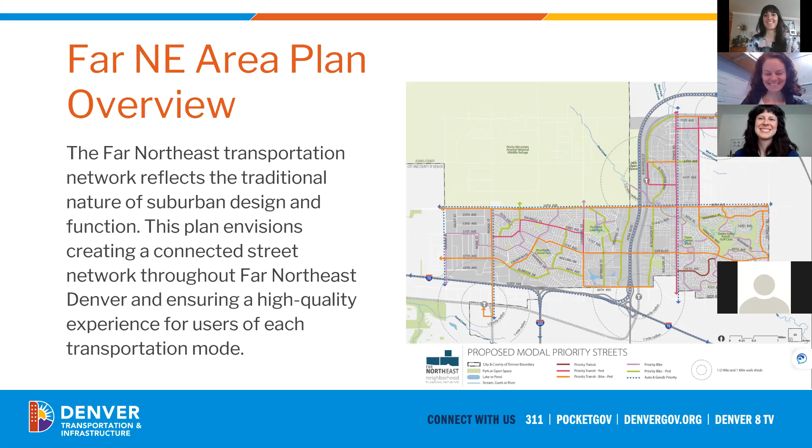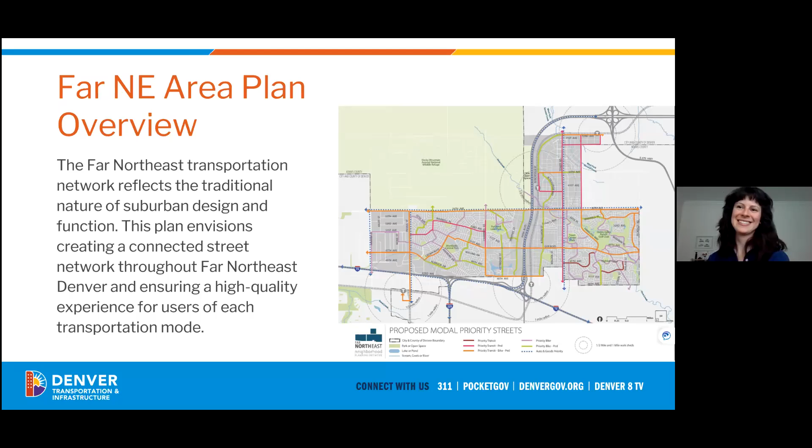Yes, so great. Hello, everyone. Glad to join you. Finally got logged in here, but I wanted to just really say that this is a great opportunity. We are really excited to be a part of this open house and to see how many of you who participated in the Far Northeast Area Plan can really truly see how plans continue to work and advance your priorities as a community.

The Far Northeast Area Plan that I had the privilege of working with many of you on, several, about 2-3 years ago for a couple of years, really laid the foundation for a lot of the city investments and infrastructure and community desired goals and objectives that you all are beginning to see materialize in your communities.

So really working with you all, working with a key stakeholder group, members of your community, many of you who have lived in the neighborhood for several generations, in hearing and learning and growing from you all and understanding really truly how you imagine your communities, your 3 neighborhoods evolving and growing over the next 10 to 15 to 20 years really was the foundation for the Far Northeast Area Plan, and really helped us as a city truly understand your community, your individual neighbors, and all of you in such a meaningful way so that we could develop a plan that represented your dreams and wishes and aspirations.

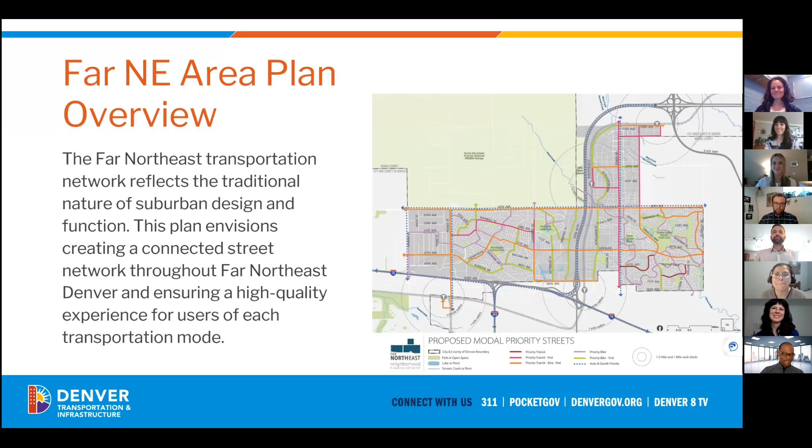I'm Paige Colton for the Far Northeast Next Steps Study. So that's, as Eugene had mentioned, an initiative by the Denver Department of Transportation and Infrastructure, so dealing with all mobility and infrastructure issues, an implementation plan to move all of the great transportation ideas that came out of the area plan.

I'm just going to walk through briefly what this Next Steps Study will look like, and then we'll get into some fun polling exercises. So our first step, and something we've already started, is to evaluate the proposed transportation networks that came out of the area plan.

We split the recommendations that came out of the area plan into distinct logical projects. So, you know, maybe a concern was, wow, Montbello has a lot of speeding. So how do we break that into individual projects that we can actually deliver on? It's evaluating essentially, are these feasible projects, and then further detailing out what these projects might end up looking like.

We're then going to score and prioritize these projects. So there are a lot of projects, over 100 that came out of the area plan. Which should we look at doing first? Which are a high priority for the community? Which can we get funding for within our department? These are all questions we're going to be asking ourselves.

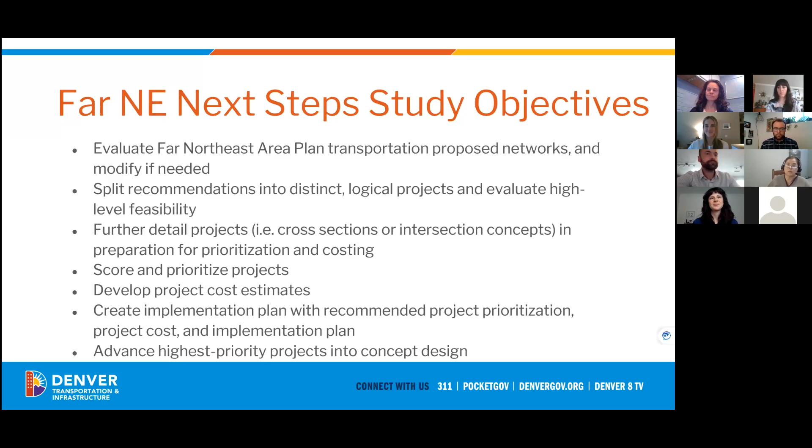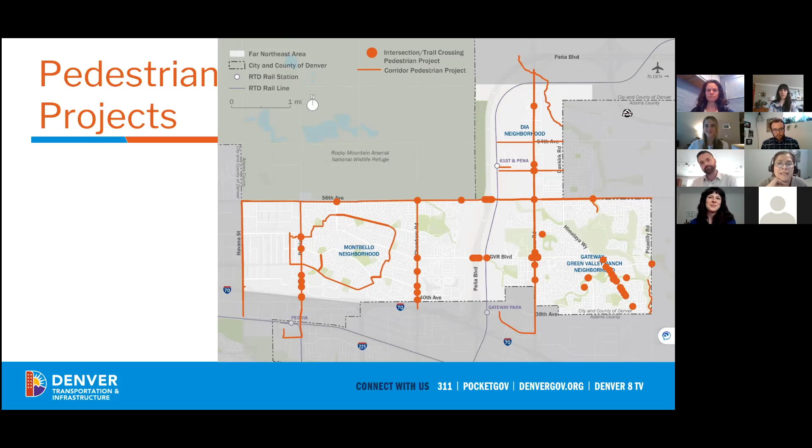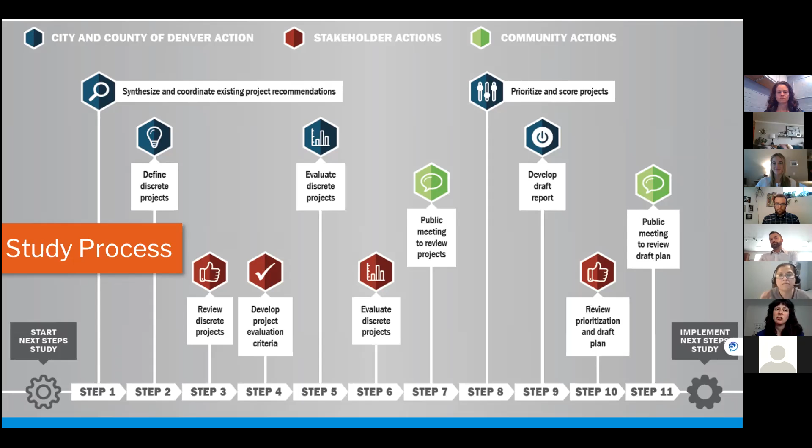Right now we are working on prioritizing projects, and we want your input on how exactly to prioritize those. We'll also run the full list of projects and our draft plan by you later this year. Next slide.

To understand can we get funding for these projects, how constructible are they, are they easy to build, are they harder to build, can we package them with other projects. That'll also help determine the timeline of when we build these projects out - how internally we can implement them. So just walking through the evaluation criteria briefly, which is intended to reflect your priorities.

So growth pressure is intended to prioritize projects in areas that the area plan identified as being regional centers, community centers, that sort of thing.

Safety is intended to prioritize projects that improve safety on our roads, especially on corridors that we consider especially dangerous in the city.

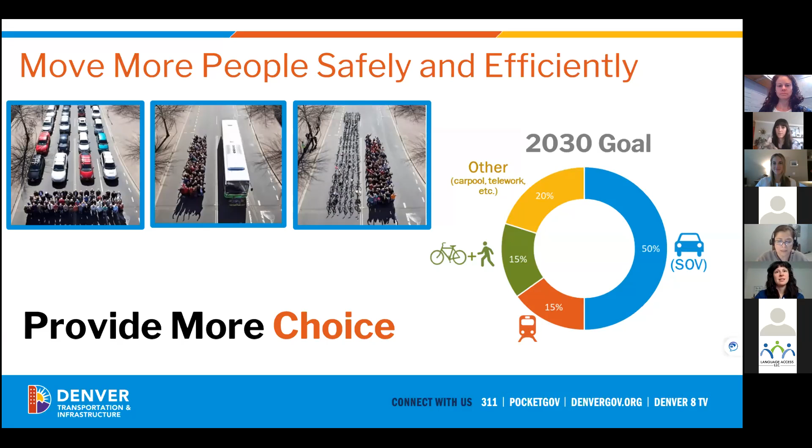Next slide. This slide lays out the mobility goals we're looking at as we move throughout the city and plan projects. One goal to highlight is that we would ideally like 30% of all people commuting to work to be biking, walking, or taking transit by 2030. Next slide.

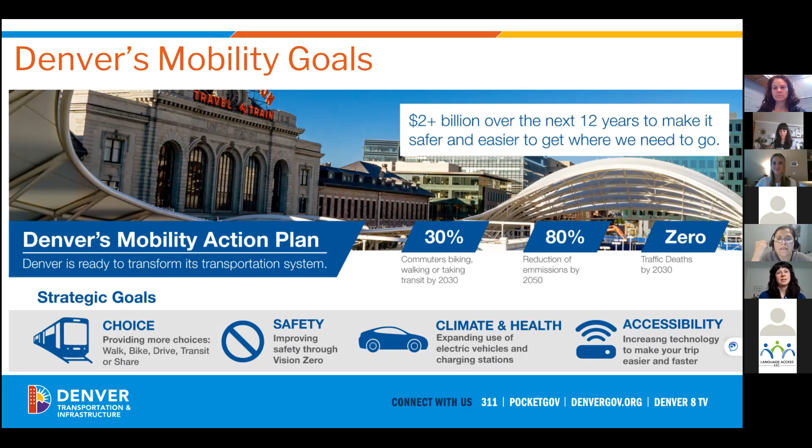Another really big goal is safety. Our goal is to have zero traffic deaths, fatalities, or serious injuries by 2030. These graphics show how people are injured and killed on our streets throughout the city.

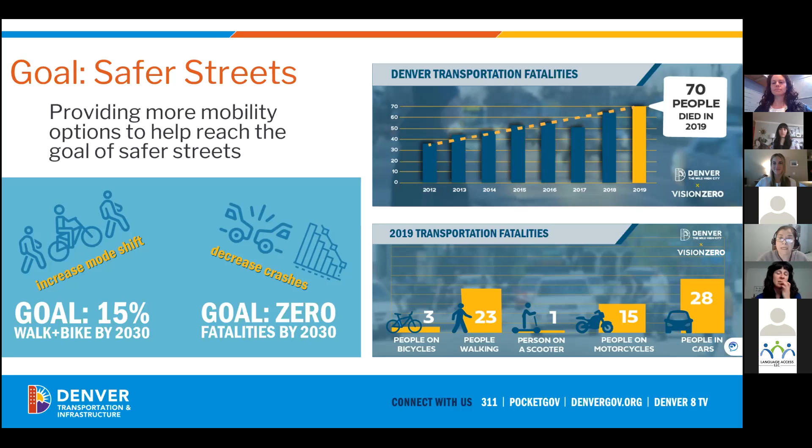So how do we achieve our commute and safety goals in the city? It has to do with our public right-of-way, which is the street space where people drive and bike, the landscaped median where our trees are, and the sidewalks. There are a lot of competing uses for these spaces, and it's one of our largest and most important public spaces in the city of Denver. So how do we think about reallocating space on our streets to improve safety, provide choice for folks, and encourage people to choose modes other than driving?

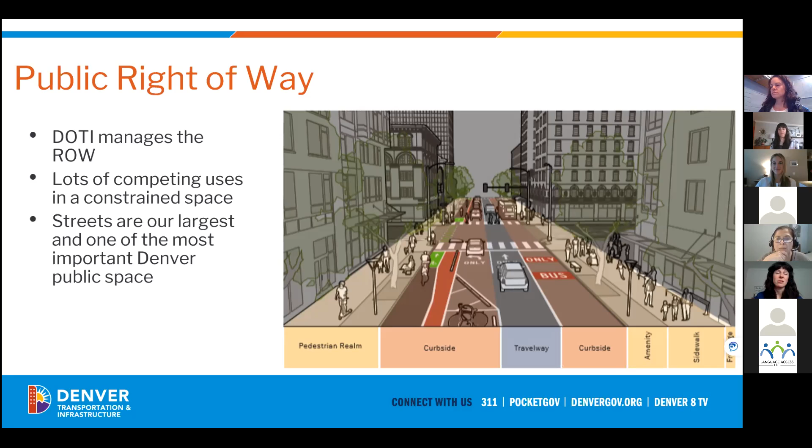We have a number of plans that lay out how we want to achieve these goals, covering a broad range of approaches. One plan to highlight is Blueprint Denver, which lays out what we call bicycle priority streets—streets where the community has said they'd like a bikeway. Speaking of the Far Northeast area plan that Eugene just talked about, that also laid out in even more detail where the Far Northeast community wants to see bikeways.

So why provide safe and comfortable bikeways? Well, the majority of people in Denver are what we call interested but concerned—meaning they're interested in biking on our streets, but concerned about safety or being able to go where they need to. Only 16% actually currently regularly feel comfortable riding a bike in Denver today.

So if we add up those who are already confident plus those who are interested but concerned, we have 75% of people in Denver who would consider riding a bike if they had more comfortable facilities.

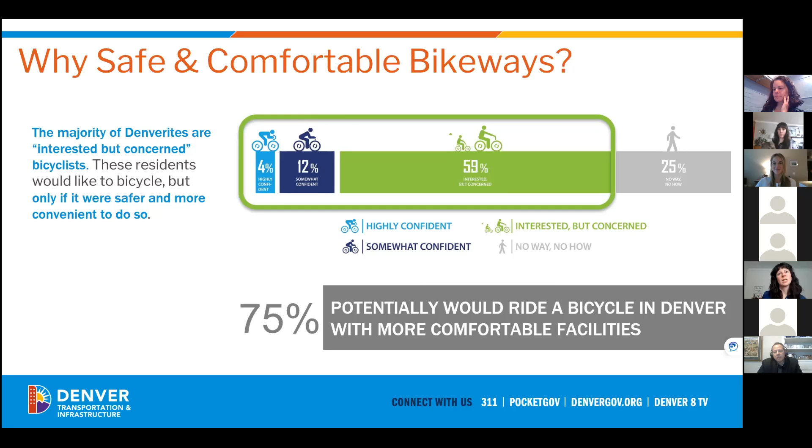So how do we build improvements to our streets, and in particular bikeway improvements? We have a lot of different programs and buckets of money where improvements get made. We've got a program that fills sidewalk gaps, our Safe Routes to School program which improves conditions in, near, and around schools for people walking and biking, a program that upgrades signals, and in the upper left-hand corner, a paving program.

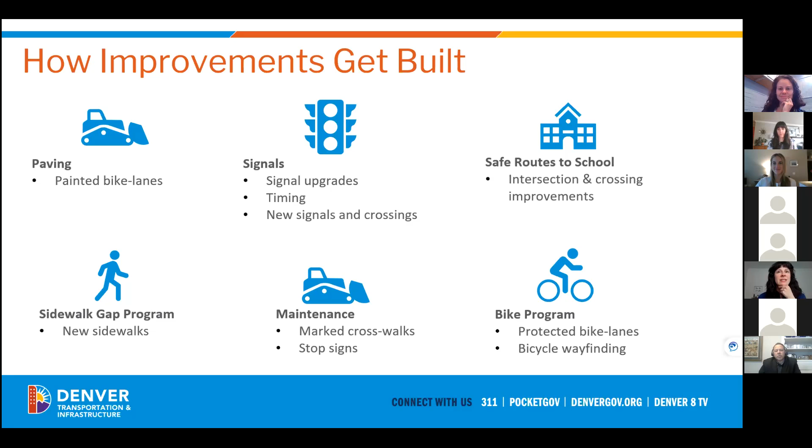The paving program typically repaves about 400 to 500 miles of roadway every year. This is a great opportunity for us to look at those bikeway priority streets I talked about earlier and ask, can we install bikeways along with our repaving program, since we're already going to the street and touching it and making changes anyway?

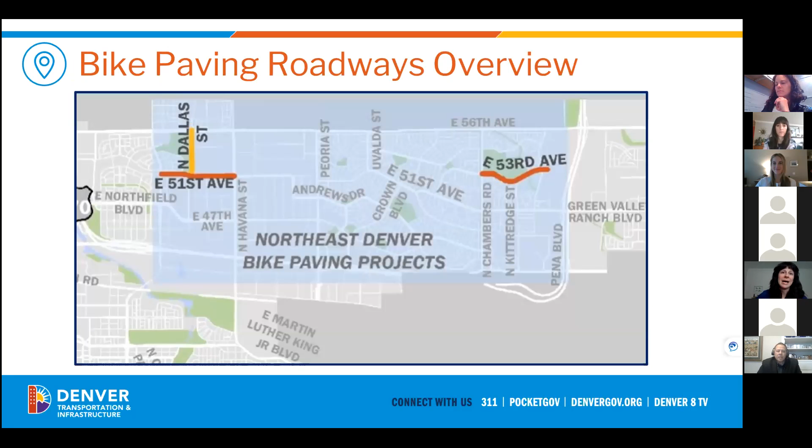So these three projects—North Dallas Street, East 51st Ave, and East 53rd Ave—are all paving projects in the Northeast area getting repaved this year, and they overlap with our proposed bikeway map.

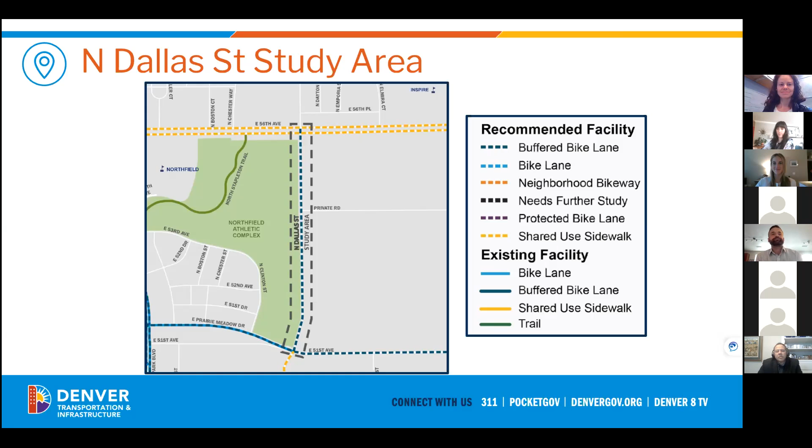As we're talking about connecting our different bikeways in the city, Paige mentioned some plans and bikeways identified through past planning efforts. One goal of the bike projects we build is to connect into that larger network. You'll notice a dashed line on East 51st and a dashed line on East 56th, with the goal of building a bikeway that connects into those, creating a network of roads that are safe and easy to get around by bicycle. This particular street, Dallas, is being repaved this year, providing the opportunity to install the bike lane identified from past planning efforts. Another benefit is that it would also connect to the park, the Northfield Athletic Complex, shown to the left on my screen.

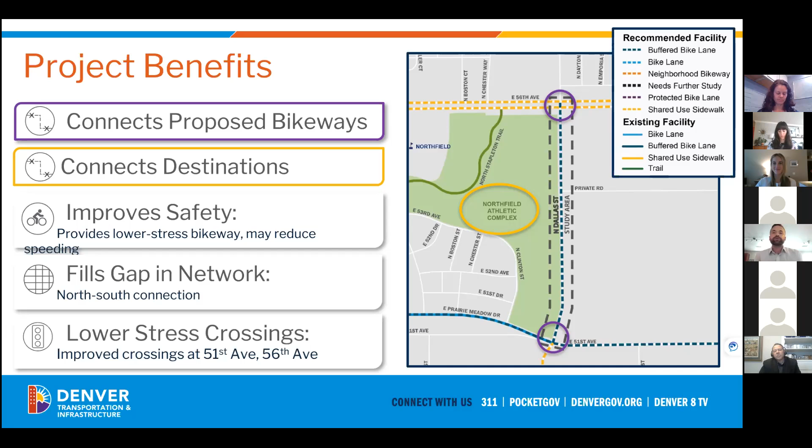There is currently no dedicated space for bicyclists. We have a wide street with two travel lanes, and you can use the lane currently for parking as well. Again, this is just what exists today.

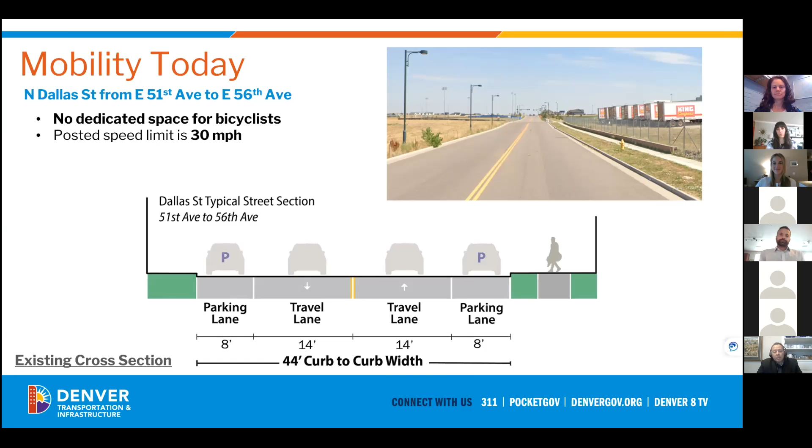One of the things we look at before we design any project is we assess the existing conditions - things like volumes, how fast people are going, how many vehicles are traveling on the street, and whether there's been any crashes to determine if there are safety issues. On this street, what we pulled from our past crash information is that there have been 16 vehicle crashes along the corridor, from 2015 to 2020.

As Paige mentioned earlier, one of our goals when we do these projects is to improve safety. So we always look to see, before we start any project, where those past safety issues may exist.

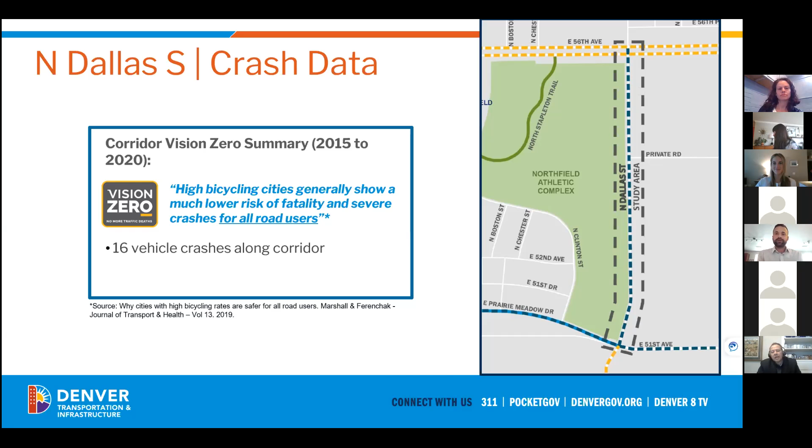And then there is a buffer that provides space between the person riding a bike and either parked cars or moving traffic. By providing that buffer, the goal is to give a little more space between a person on their bike and someone in a moving vehicle. So that's what that buffer is for, and that's what's being proposed on this particular street.

As I mentioned before, currently there are land uses on either side - undeveloped on one side, and industrial uses on the other. What's currently proposed is to potentially remove one or both sides of the parking lane on this street in order to accommodate the buffered bike lane. Because of the undeveloped land and industrial uses on the other side, there are no businesses or residents that directly front this particular street.

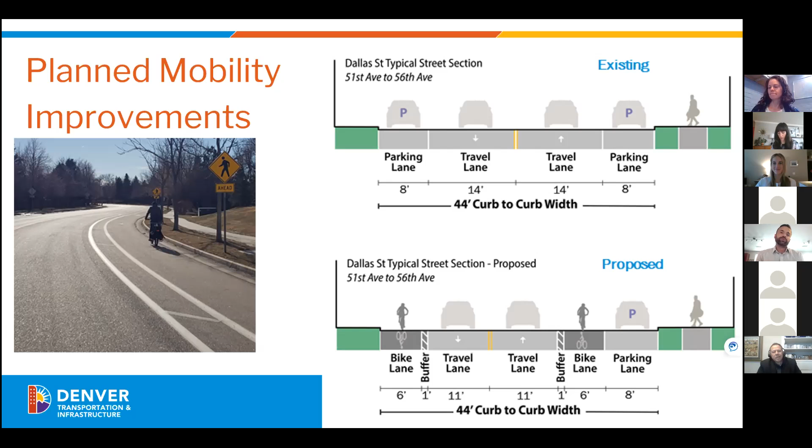So just wanted to add that part in - that is what's currently being proposed. This design has not started yet, so we are still doing our homework and research on this. But one of the things we want to hear from you is whether there are things we should be considering as we design this project and advance it.

So that's all I have for that project. I'm going to hand it back over to you, Paige, so you can talk about East 51st.

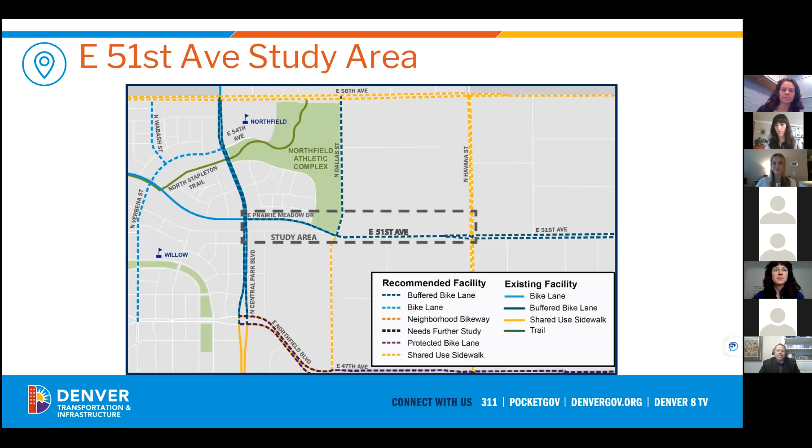This proposed bikeway extends from Central Park Boulevard to Havana Street. The intent is to connect the new buffered bike lane that was just installed last year on East 51st Ave, east of Havana, to the bike lanes that exist starting at Dallas and going west, and also connects to the Northfield Athletic Complex and bike lanes on Central Park Boulevard.

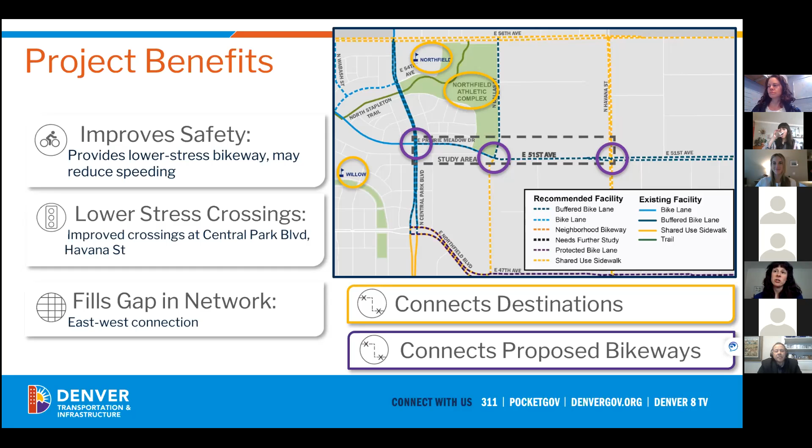We've also got a couple of gnarly, larger intersections in this area that we'd like to improve with this project - Central Park Boulevard, Dallas, and Havana are all bigger intersections and/or carry some freight turning movements that we'd like to address.

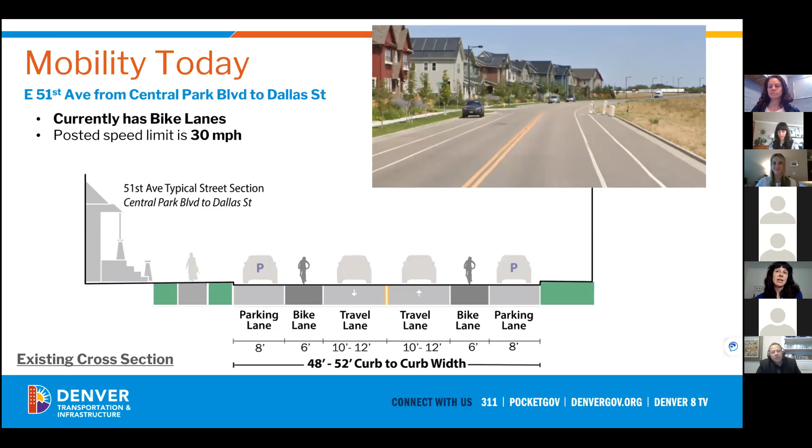So what does the street look like today? We've got an existing bike lane from Central Park Boulevard to Dallas Street, and the speed limit is currently 30 miles per hour. We've also got a travel lane in each direction and then parking on either side.

Then from Dallas to Havana, we've got pretty wide travel lanes and parking lanes. We've also got some freight trucks that park and or are stored here as well.

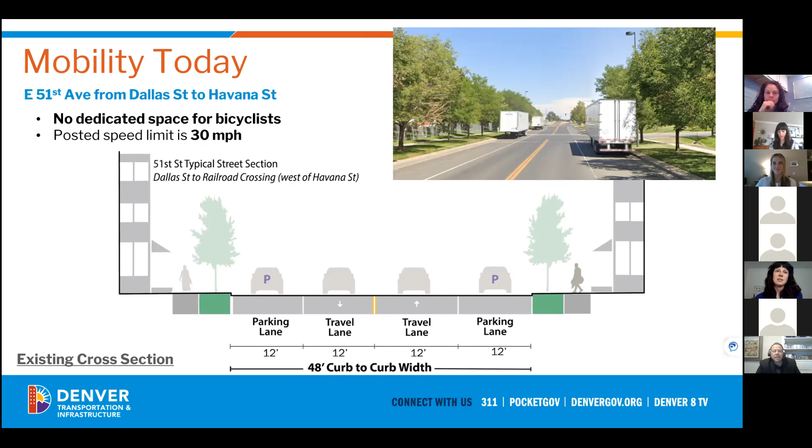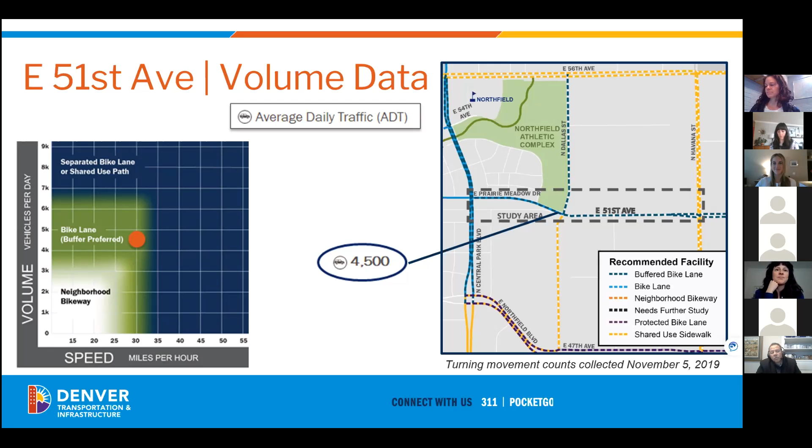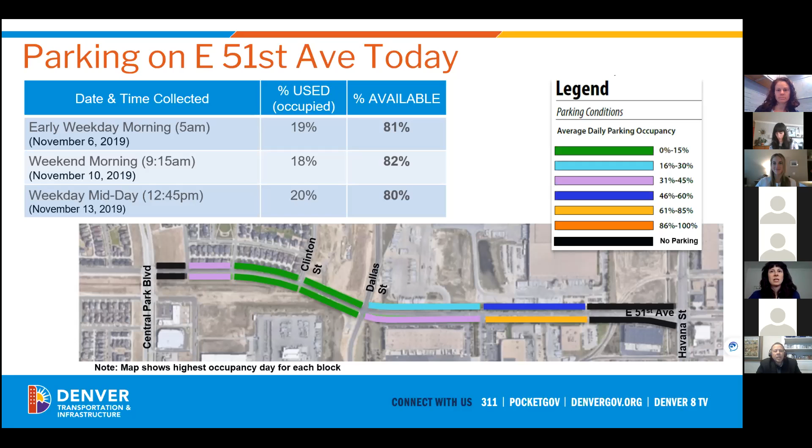As I mentioned, our data shows a bike lane, if possible a buffered bike lane, would be preferred on this corridor. There are bike lanes existing from Central Park Boulevard to Dallas already, so we're looking at possibly upgrading those to buffered bike lane, but we want to hear from you about your experience on those existing bike lanes.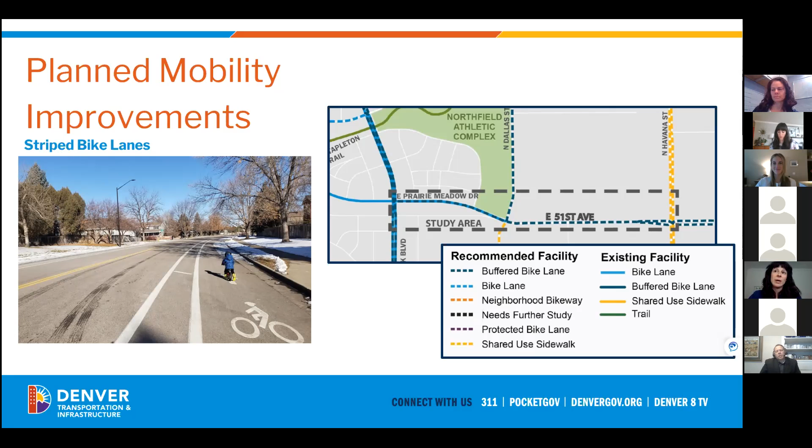From Dallas to Havana, we would recommend installing a buffered bike lane. That's especially because of the freight traffic there, and we want to provide more space for people biking and space between big trucks and people biking.

Okay, switching gears a little to a different project. That's a lot of information. We're now moving to the Gateway neighborhood, just east of Montbello.

So East 53rd Ave, between Chambers and about Memphis, is what we're looking at. This is, again, a repaving corridor.

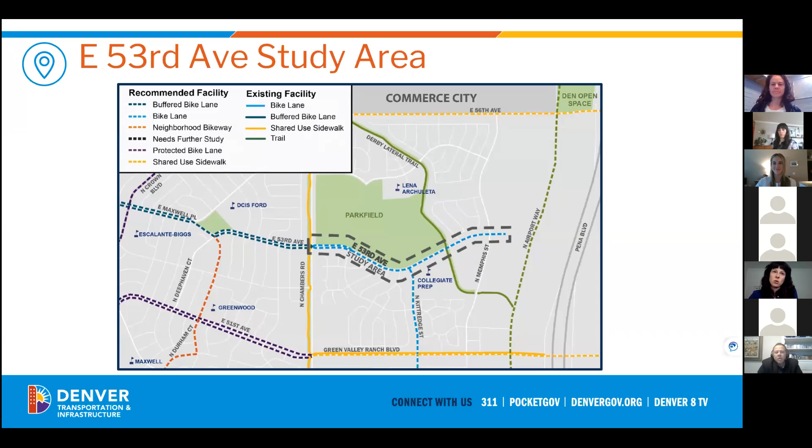The intent is to connect all the trails on the east side, and the proposed trail even farther east that hasn't actually been developed yet, to the shared sidewalks along Chambers Road, and then eventual bikeway along 53rd Ave to the west of Chambers. And of course we've got connections to Parkfield Lake Park and the school complex right next to Kittredge.

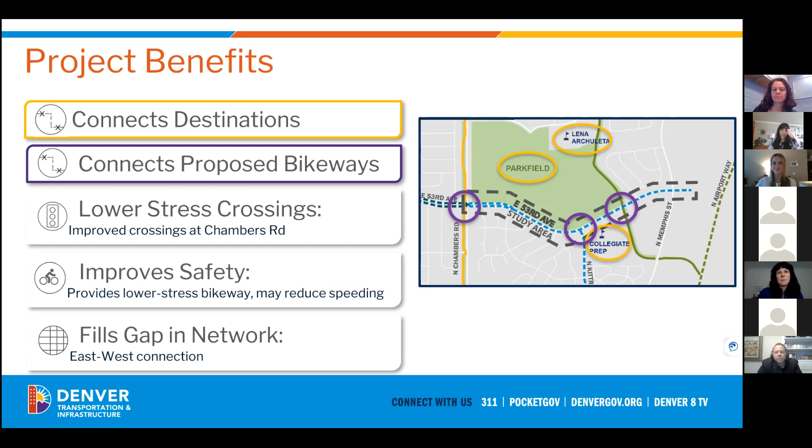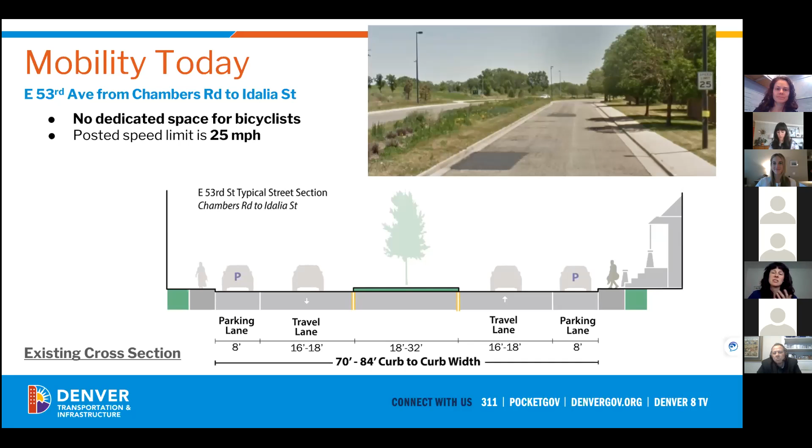So what does the street look like today? Between Chambers and Idalia, we've got a median, travel and parking lanes on either side. It's a really wide stretch. There isn't a ton on either side, just the backs of some houses and the park.

From Idalia to Memphis, we have two pretty wide travel lanes and then parking areas on either side.

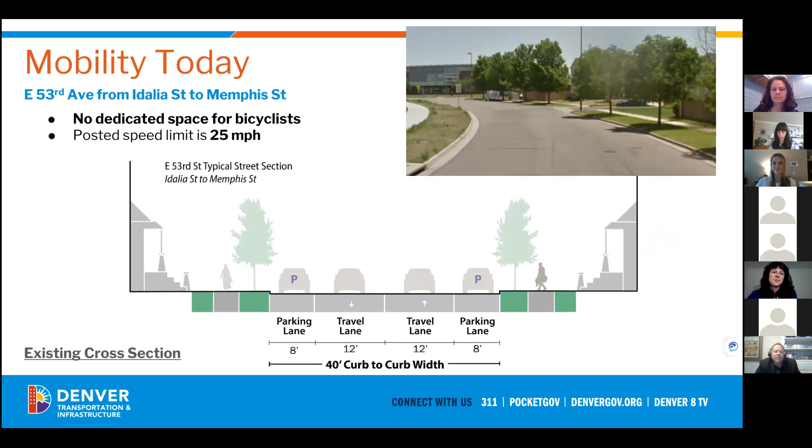This might be explained by the crossing with Chambers, which is a big street. When arterials like that intersect any street, crossings become more difficult and we see more crashes.

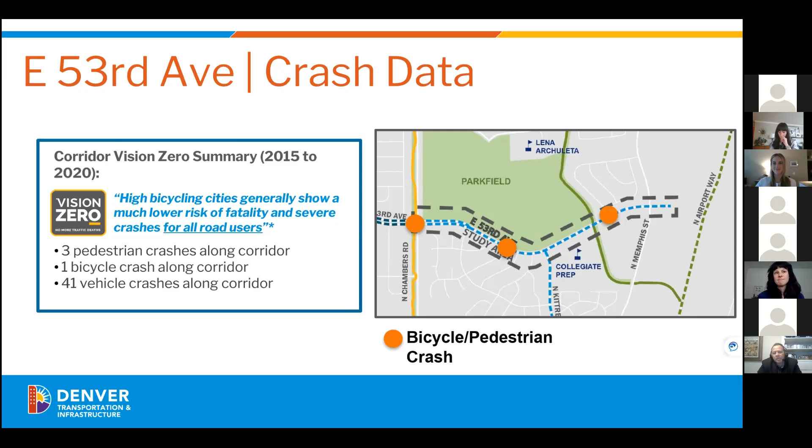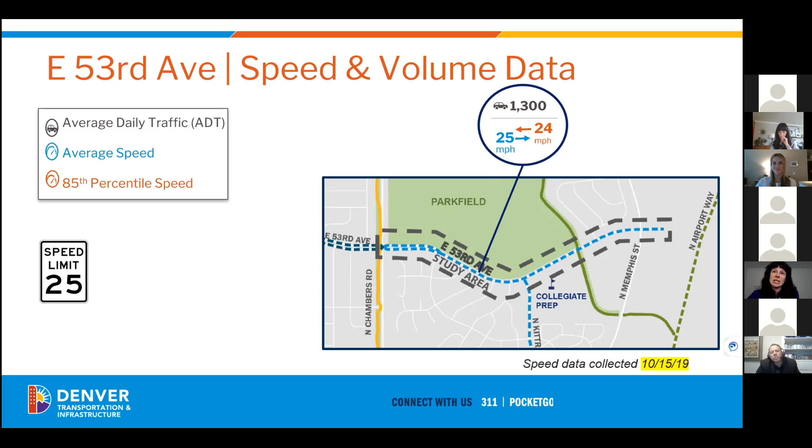We also took a look at who's parking along the corridor. We know that the school complex faculty and staff use 53rd Ave to park during the school day. We weren't able to collect that data due to COVID and school not totally being in session.

But we did collect 5 a.m. data, so that tells us about overnight parking. And what we found is mostly people park, if they are parking overnight, just to the west of Memphis, but otherwise there's very little parking along that corridor overnight. We've got 86% of parking spots available when we took that 5 a.m. count last week.

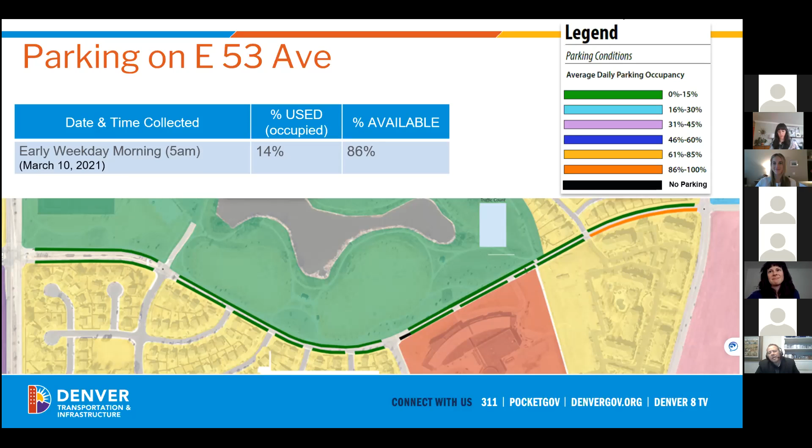So based on those speeds and volumes, we are proposing adding a striped bike lane, and the implications of that would be removing parking on one side of the street. We definitely want to hear from you about your experience along the road, where you do park at maybe non-overnight hours, really everything to do with the street that you experience as a resident.

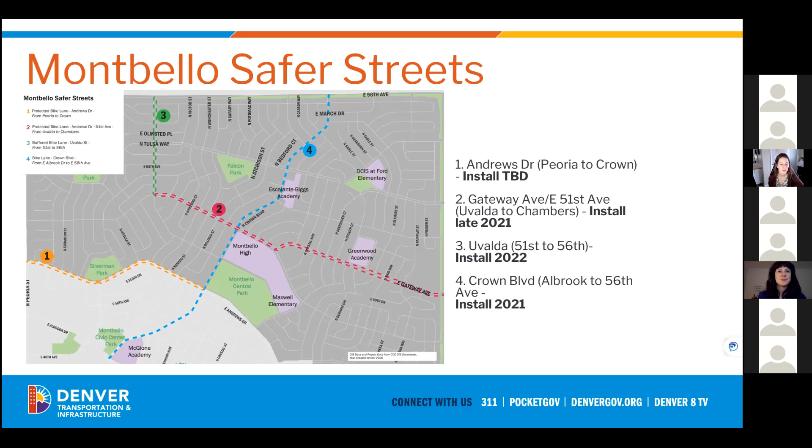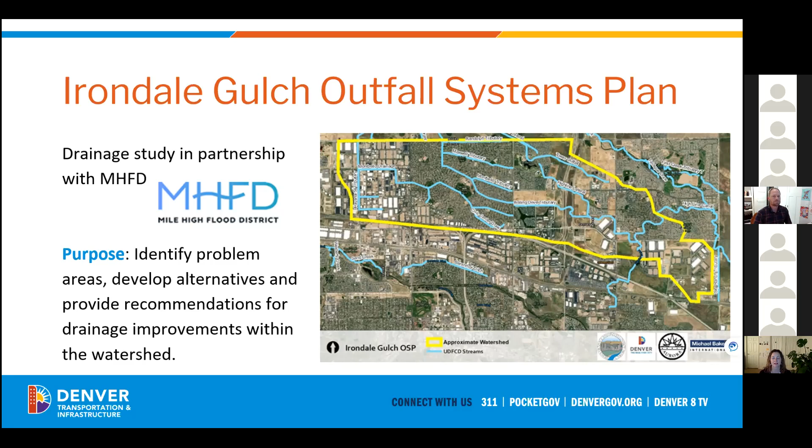To give you an idea of specifically what we're talking about, many of the streets through the Montbello neighborhood have medians used to convey flood flows during high rainfall events. All of them have some combination of a concrete lined channel and some sort of vegetated space adjacent to that, and they're very different.

These types of systems are really, really high maintenance. One of the things we're looking at with this study are opportunities to replace those systems with something that functions better than what is there, but is less maintenance.

The exciting part is that we're looking at these as great opportunities to give this space back to the community. Right now they're designed to do one thing, and they sit year round, only really utilized when it rains, particularly during high rainfall events when they're fully realizing their potential.

So what a great opportunity to look at the system, look at the streets - what can we give back to the community to be used all the time instead of just when it's raining? That's really the cornerstone of this study and what we're trying to accomplish. I'm really excited that this multimodal study is happening at the same time. So thank you, Keith.

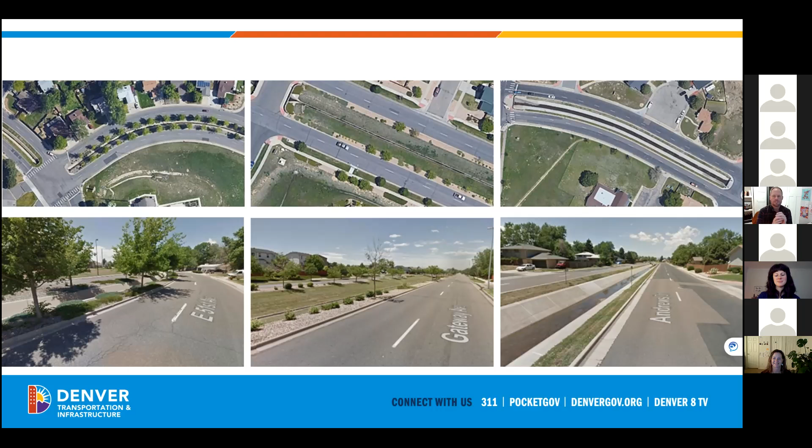So just to put this in context, we have several streets within the Montbello neighborhood that currently have these open drainage channels. Most of those streets have 2 travel lanes on either side.

As Teresa was saying, it's a really good opportunity, and it's nice coordination within the city to coordinate the drainage study with the Far Northeast Next Steps study that Paige summarized earlier. That study is going to look at mobility improvements that can potentially be combined with some of the drainage improvement projects.

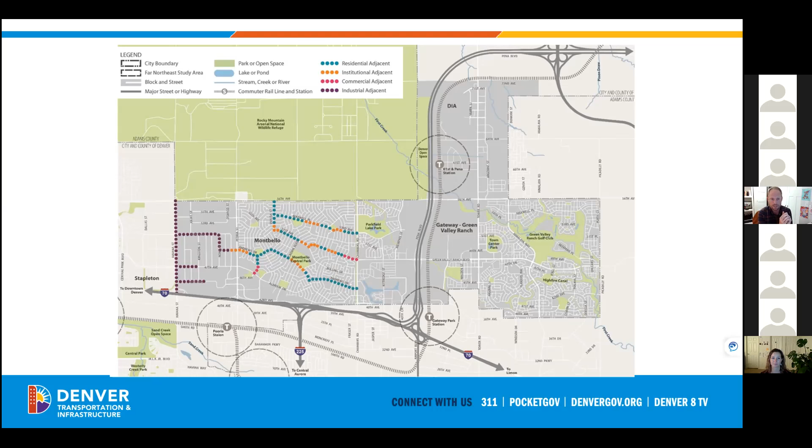Generally those improvements will focus on some of the same themes we talked about with the bike paving projects, which are: how much volume are those streets carrying, what are the speeds along those streets, crashes, etc. — and propose alternative uses for the paved space, and maybe even complete street redesigns. So I wanted to present, in the next few slides, some options that may be considered.

By no means are these options final or something that has been decided. This is all part of the upcoming work over the next several months. So this is just a schematic of what's out there today — a concrete channel running down the middle of the street.

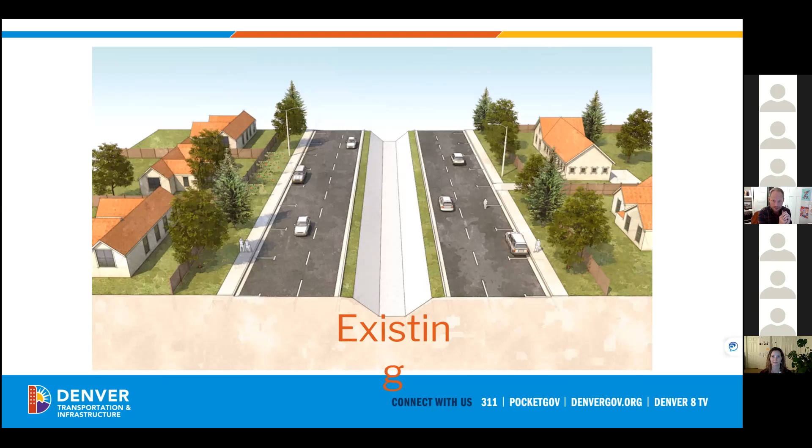One relatively straightforward and simple option would be to expand that channel a little bit and provide additional landscaping along the sides of the existing channel. This would basically be the status quo on the street itself, still maintaining the 2 travel lanes and parking on either side.

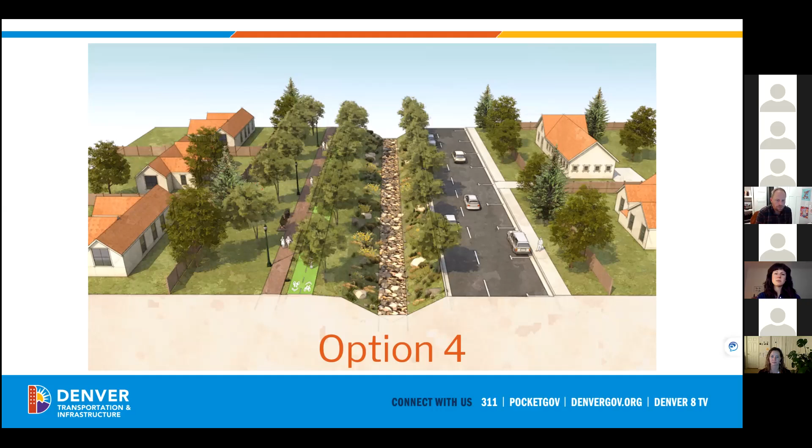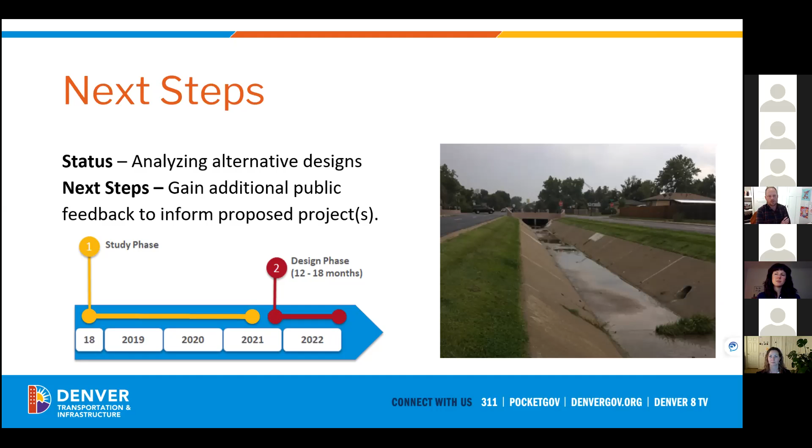Thanks. As your study and the Far Northeast Next Steps study progress, we will further develop these options into concepts to present again to stakeholders and the public for feedback. I'd like to hear what folks are thinking about the various mobility options presented here. I know it's a little early in the stormwater project and study to necessarily zero in on a defined alternative or needs, but from the mobility standpoint, I'd like to hear some feedback — I know we have a couple of questions too. I think we could look for questions now.

Oh, okay, I'm seeing one. Yes, we have one question from Larry. Larry, do you want to unmute and expand on this question a little bit?

Can you hear me? Yes. I wondered, have you guys seen lately the view there on Gateway from Chambers to the high school? Have you actually walked that area? I'm sorry, Larry, the view from where? If you're coming from Green Valley Ranch, going west on Green Valley Ranch Boulevard, it changes to Gateway, if I'm not mistaken, and it goes all the way down to the high school, 51st. Familiar with that area? Yep.

Right now, that's really, really nice. There's been work on two intersections where they've actually made little mini parks, but it also acts as a reservoir for overflow. I thought it was great. I surely would hate to see that change per se, but that definitely falls in the qualification of what you're talking about, the 2-lane traffic on both sides and making changes and what have you. I don't see why you would change that right now anyway. Does that make sense to anybody else? And I'll shut up.